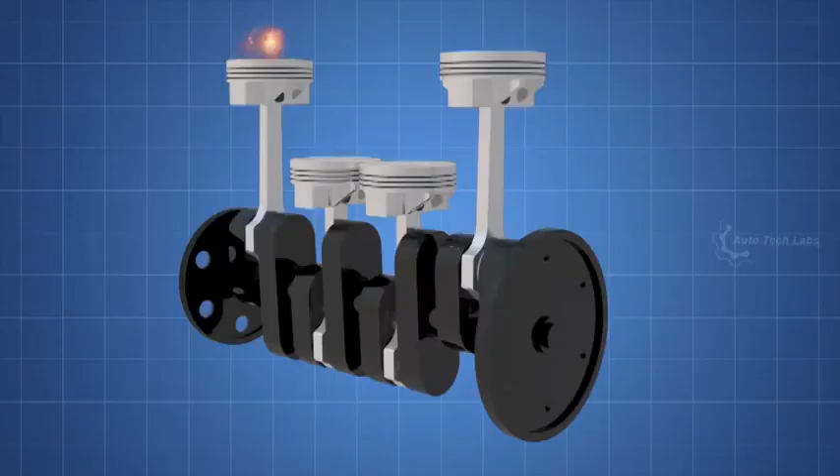A car engine is basically an internal combustion engine where power is generated through expansion of high temperature and high pressure gases. A lot of heat is generated due to the combustion gas and the friction of mechanical parts. For sustained operation, this excess heat should be removed from the engine and kept at operating temperature.

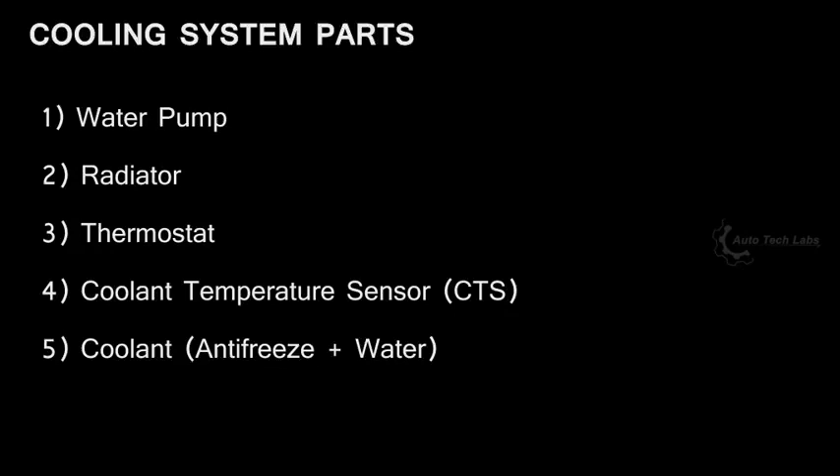Now let's see the parts involved in cooling the engine. The main parts for cooling the engine are water pump, radiator, thermostat, coolant temperature sensor, and coolant.

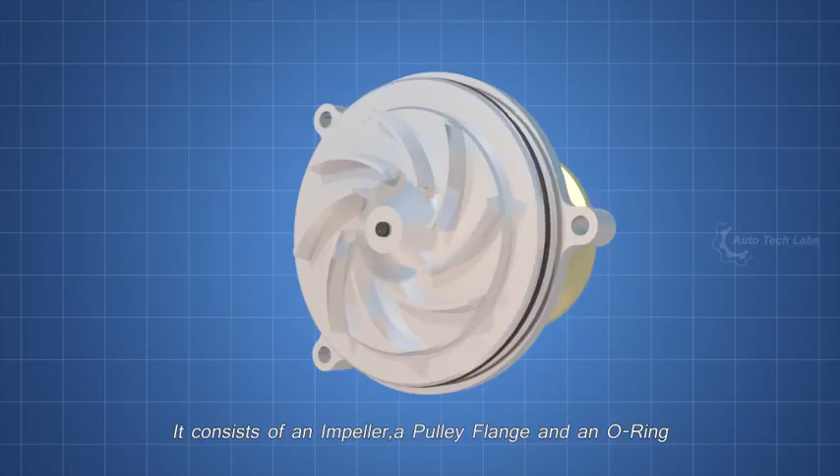First, the water pump. The water pump is the heart of the cooling system, which pumps the coolant. It consists of an impeller, a pulley flange, and an O-ring. The impeller is driven by the engine drive belt through a pulley.

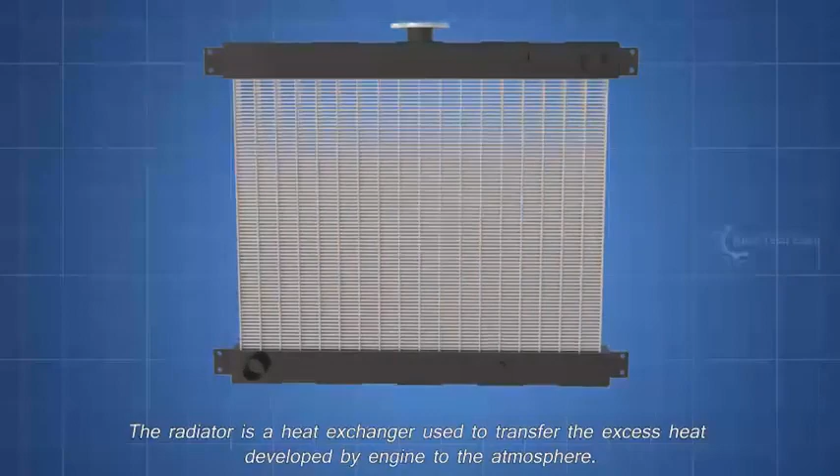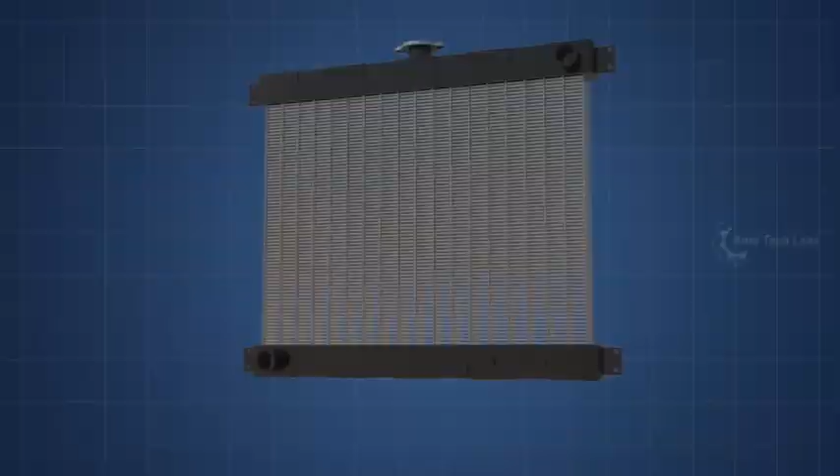Next, the radiator. The radiator is a heat exchanger used to transfer the excess heat developed by the engine to the atmosphere. The radiator has an inlet port, outlet port, a drain plug, and a radiator pressure cap. The radiator pressure cap plays a vital role in the cooling system, which will be explained later.

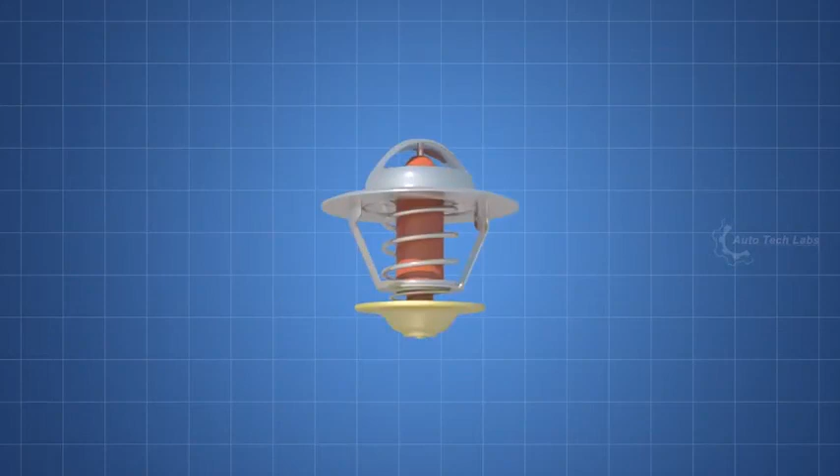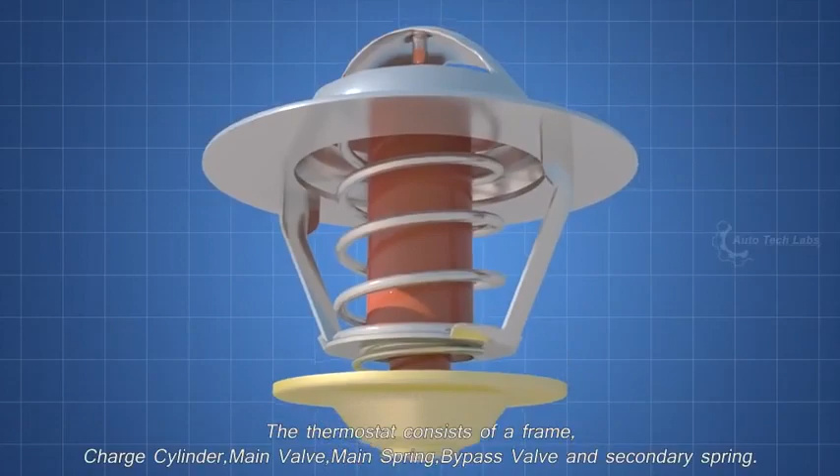Next, the thermostat. The thermostat is a valve which regulates the flow of the coolant and helps to maintain the proper operating temperature for the engine. The thermostat consists of a frame, charge cylinder, main valve, main spring, bypass valve, and secondary spring.

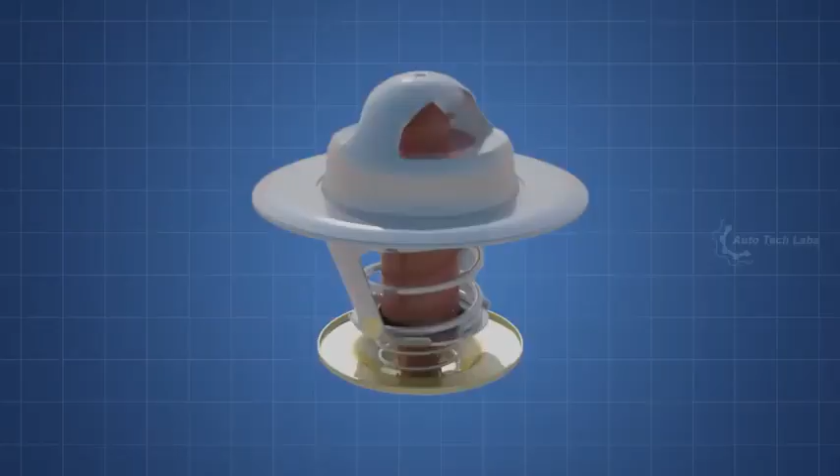Next, the coolant temperature sensor. The coolant temperature sensor is used to monitor the engine temperature. The ECU will use this data to manage fuel injection and ignition timing. Some engines have more than one coolant temperature sensor. The data is also used to control the radiator fan and to update the temperature gauge on the driver console.

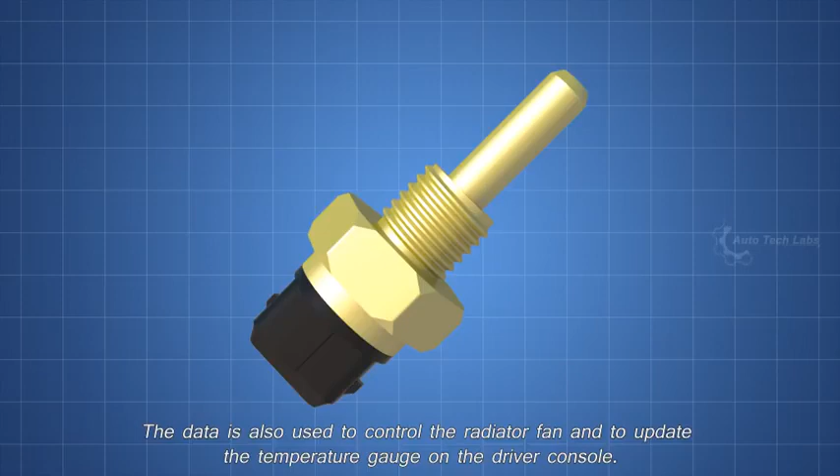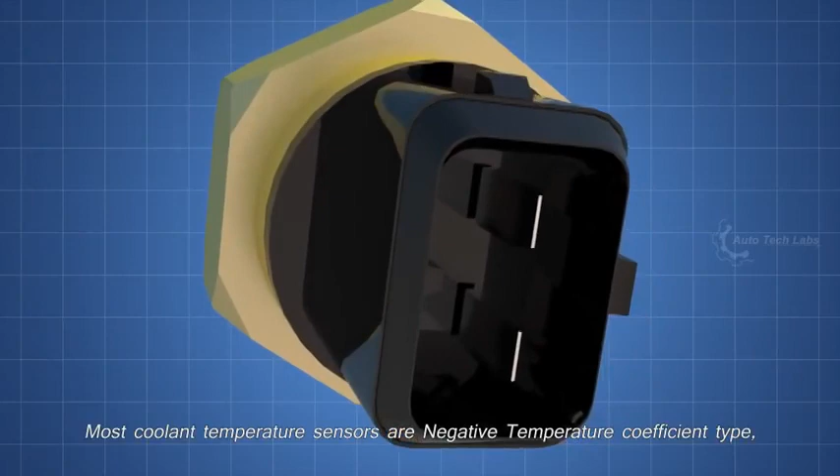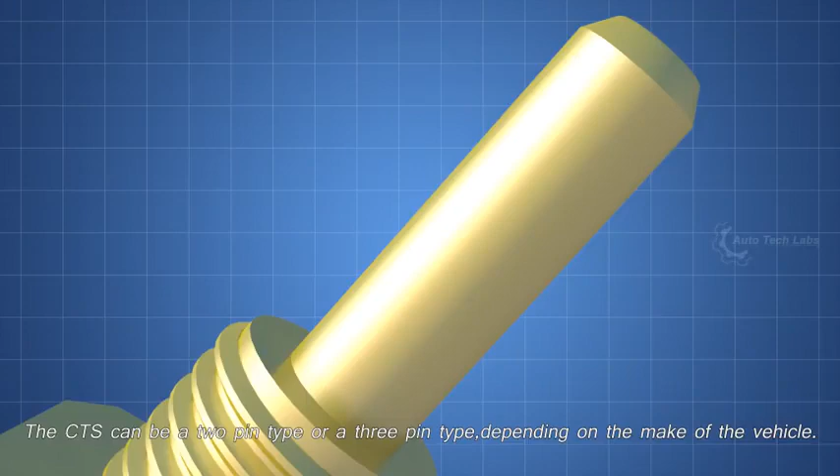The coolant temperature sensor consists of a sensing probe and an electrical connector. Most coolant temperature sensors are negative temperature coefficient type, meaning as the temperature increases, the resistance will decrease. The CTS can be a 2-pin type or a 3-pin type, depending on the make of the vehicle. These are the main parts involved in an engine cooling system.

Now, let's see how these parts work together. The pistons are contained inside the engine block, in which each of them will function. Above the engine block comes the head gasket, which provides sealing between engine block and engine head. It avoids compression leaks and oil or coolant leaks into the cylinders.

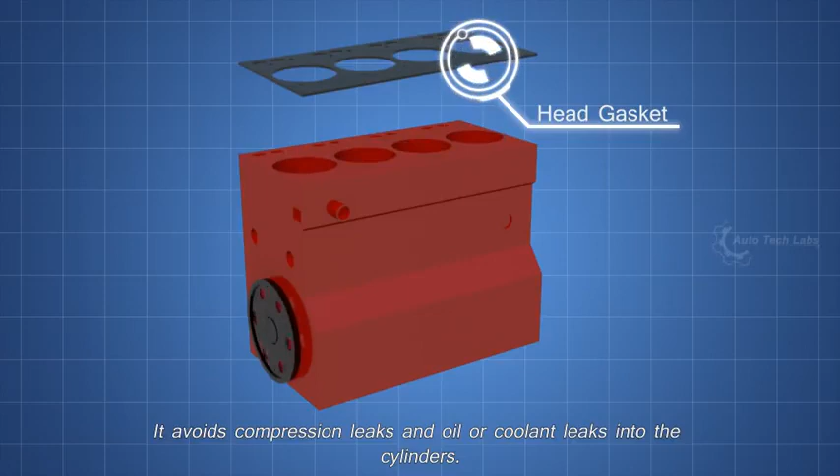Above that comes the engine head. The engine has a safe passage through which the coolant can flow without entering into the cylinder or mixing up with the oil. This passage is known as the water jacket.

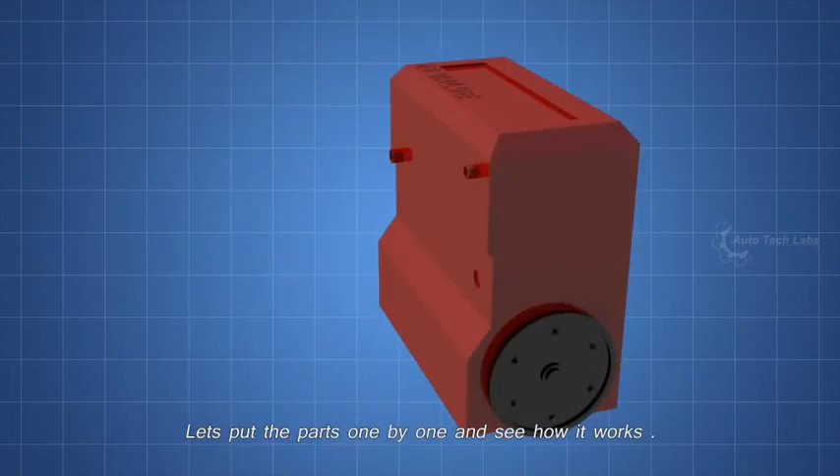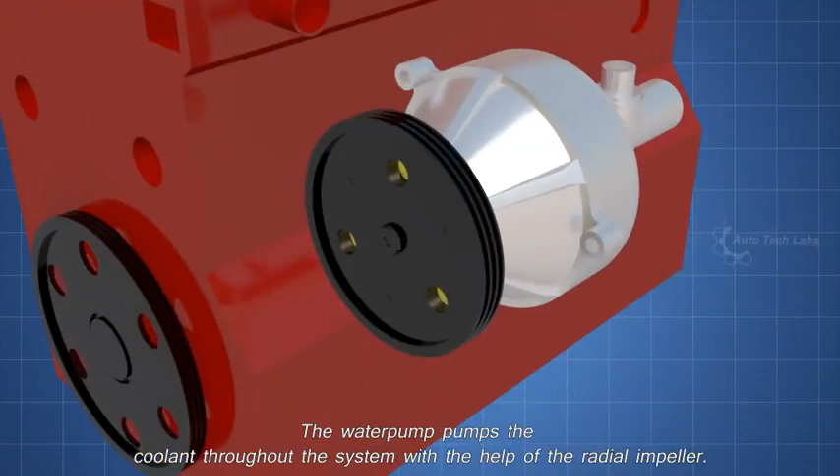Let's put the parts one by one and see how it works. The water pump pumps the coolant throughout the system with the help of the radial impeller. It is driven by the engine itself, using a serpentine belt. The serpentine belt also drives the power steering pump, alternator, and AC compressor. But for now only the water pump is shown.

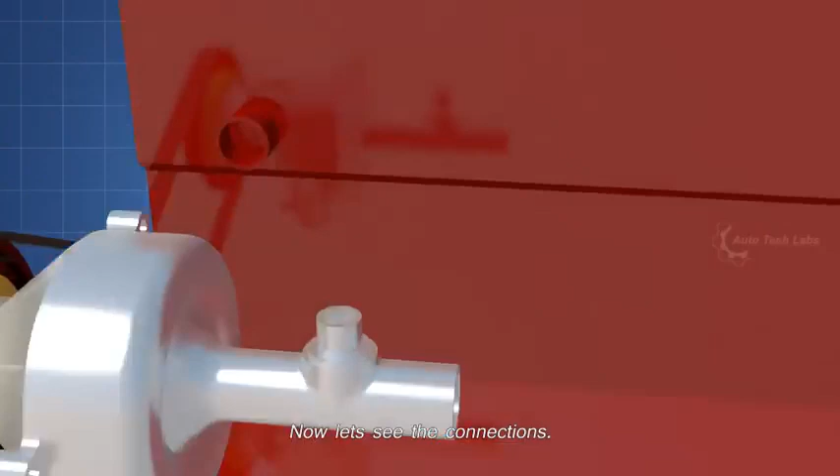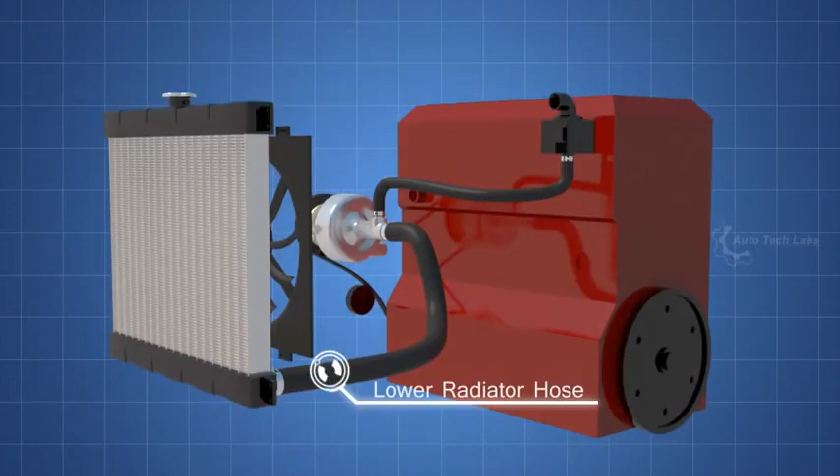Now let's see the connections: the thermostat bypass hose, the thermostat housing, inside the thermostat, the radiator and the radiator fan, the lower radiator hose, the water pump outlet hose, the upper radiator hose, the coolant expansion tank, the expansion bleed hose, and the coolant overflow hose. So, finally, let's get into the working, starting with the thermostat.

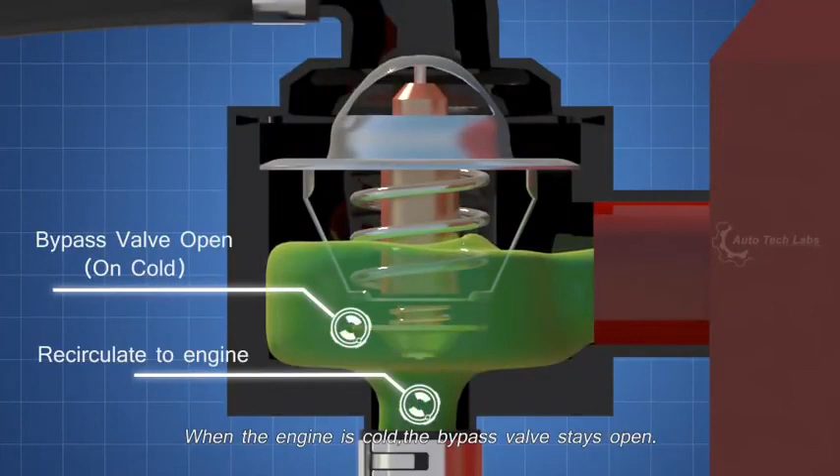The thermostat is actually a valve which regulates the flow of the coolant. It will always be covered in the coolant, so that the temperature can be sensed. Let's start the operation from a cold engine. When the engine is cold, the bypass valve stays open, so the coolant bypasses the radiator and recirculates through the engine. This helps the engine heat up to operating temperature quickly.

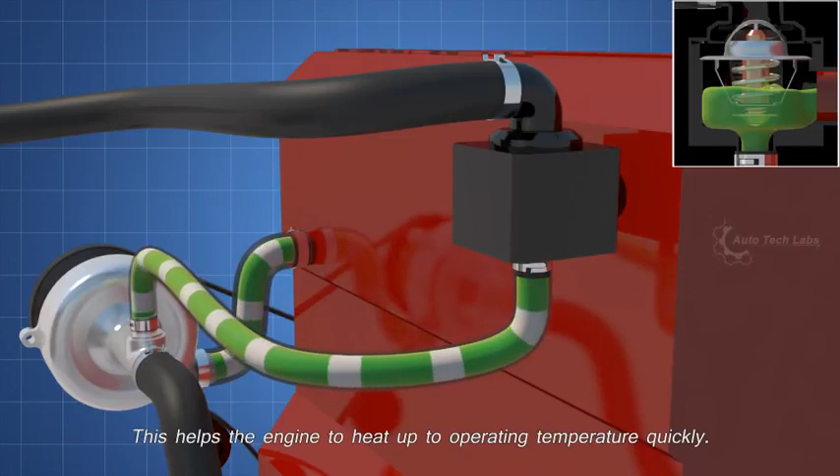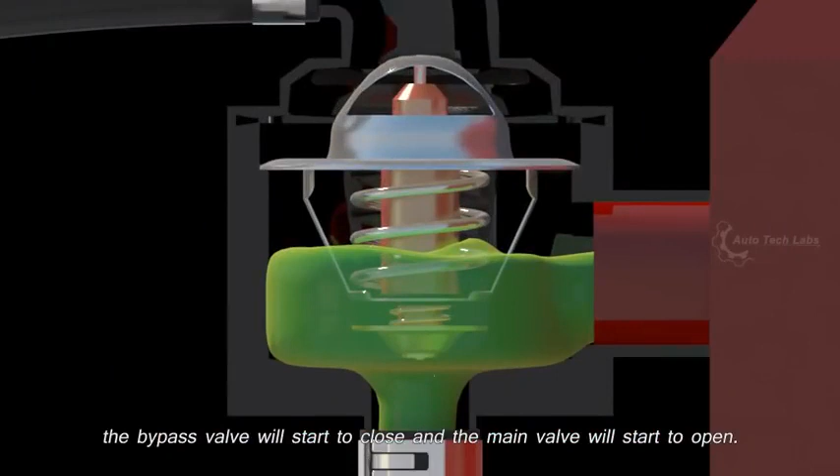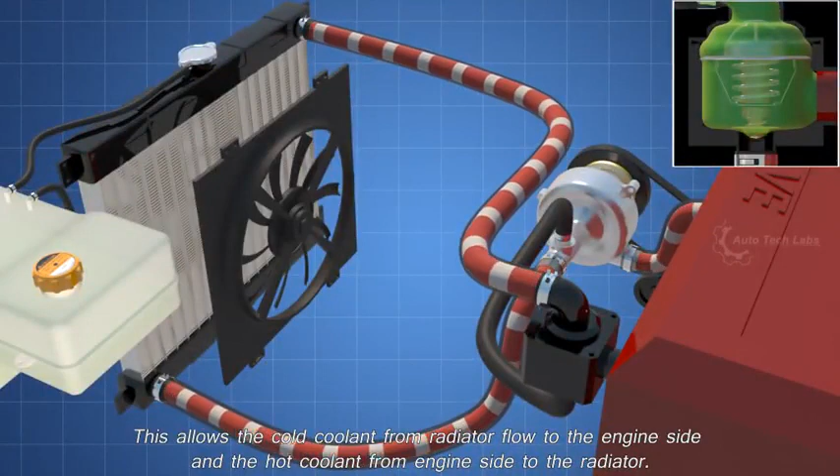Eventually, the coolant temperature increases by absorbing heat from the engine. Once the coolant starts to reach a higher temperature, usually between 160 to 190 Fahrenheit, the bypass valve will start to close, and the main valve will start to open. This allows cold coolant from the radiator to flow to the engine side, and hot coolant from the engine side to flow to the radiator. In most cars, the coolant temperature sensor is located near the thermostat housing.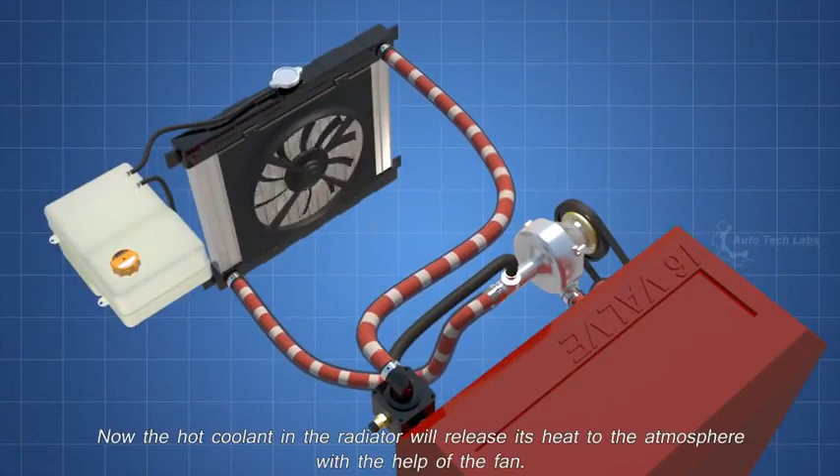It will turn on the radiator fan if the coolant on the radiator side is at high temperature. Now, the hot coolant in the radiator will release its heat to the atmosphere with the help of the fan. At the same time, the cold coolant received from the radiator will start to absorb heat from the engine for the next cycle.

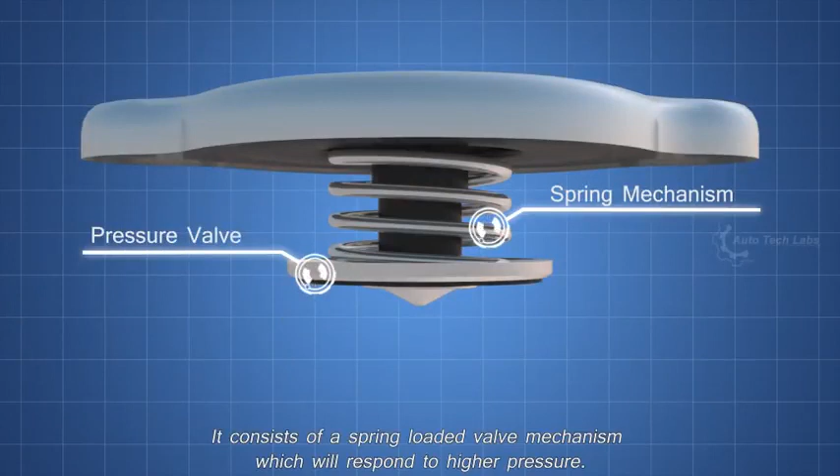Heating liquid inside a closed system always builds up pressure. So, how to maintain the pressure? Here comes the role of the radiator pressure cap. It consists of a spring-loaded valve mechanism, which will respond to higher pressure.

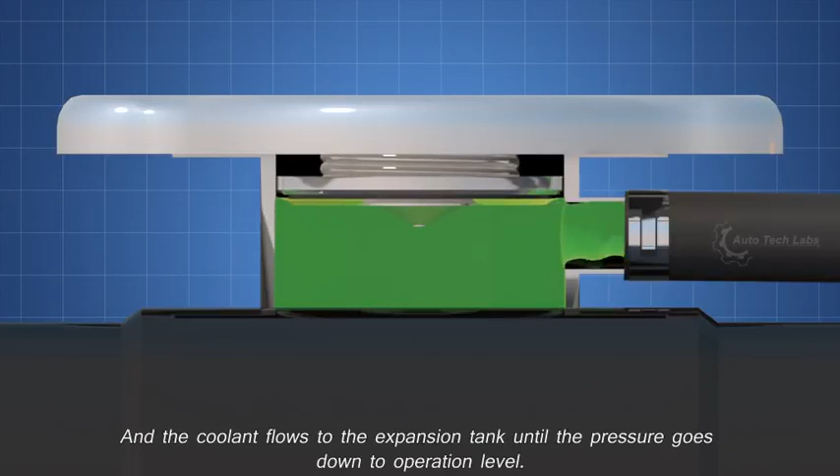Reaching a pressure above 15 psi will push the pressure cap valve, and the coolant flows to the expansion tank, until the pressure goes down to operation level. And when the system cools down, the vacuum inside the system sucks back the coolant from the expansion tank.

In case there is too much pressure build-up in the system, due to trapped air or other failures, the coolant in the expansion tank will be pushed out through the overflow hose.

The car heater system is a part of the engine cooling system. The heater system comprises the heater core, inlet and outlet hoses, and a heater control valve, which is optional and cannot be found in all vehicles. The heater core acts as a radiator, dissipating heat from the hot coolant to the vehicle interior, using a blower.